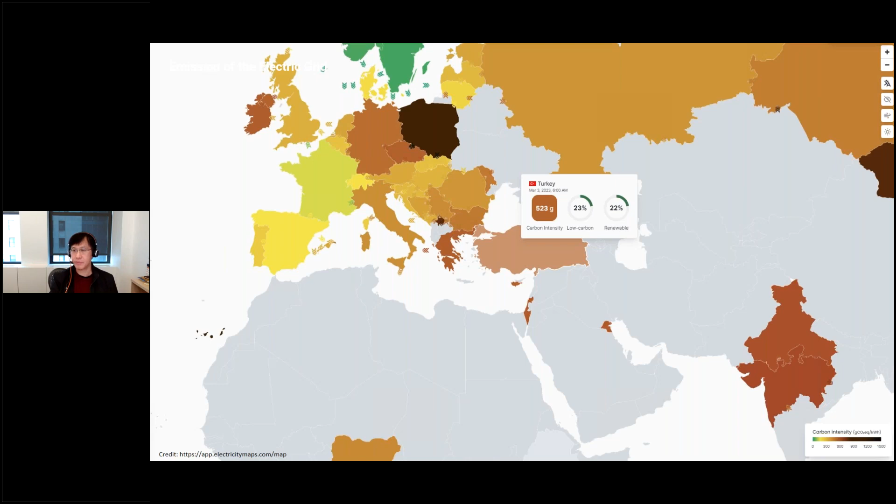And when you look at embodied carbon, the x-axis is different types of buildings, and the y-axis is embodied carbon. Now the range here is about 250 to about 1,000 plus, right? So there's a wide range of embodied carbon. But if you zoom into specific building types, like office buildings, we know roughly it's about 500 kilograms CO2 equivalent per square meter embodied carbon intensity, but it varies. If you go to hospital and health, it could be anywhere from 600 to 1,000. So there's still a range of targets, and we don't have an exact handle on benchmarking, though we now know the range better. So it's not only a moving target in operational, but also embodied carbon.

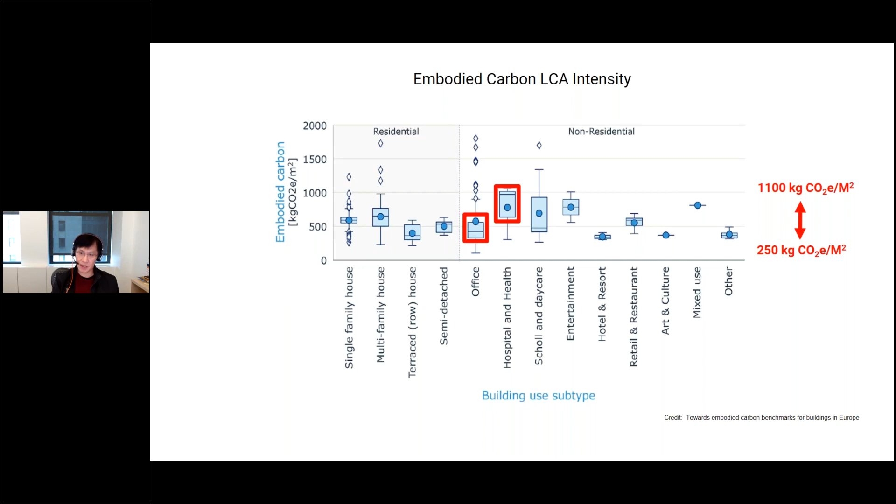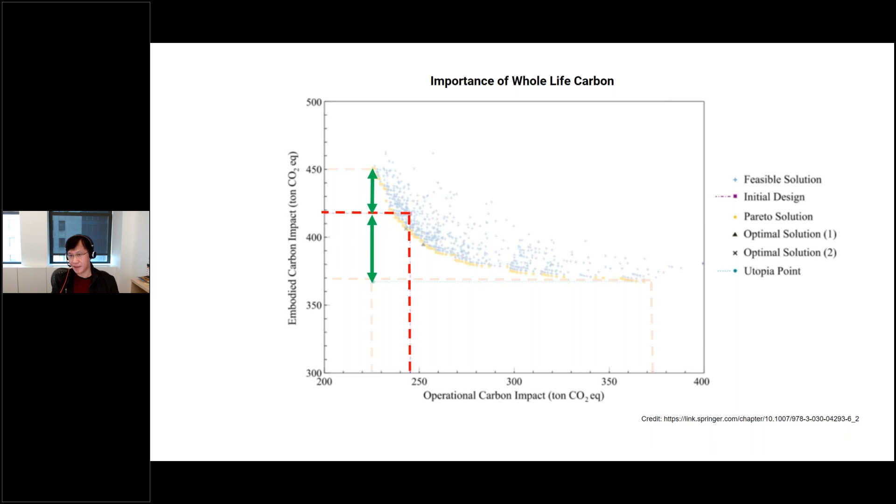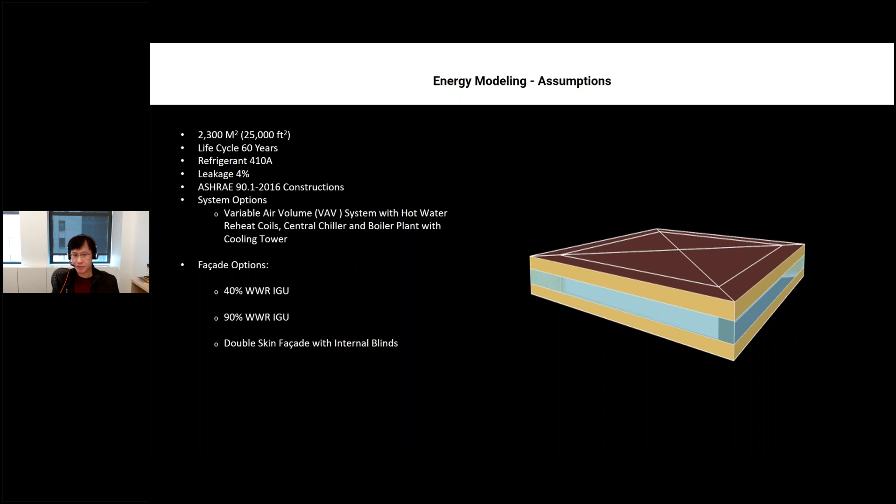Now that is difficult to understand, so I give you an example here. We have an office building about 2,300 square meter floor plate. This is EnergyPlus, very conventional building. We have three options here: 40% window wall ratio, 90% window wall ratio, or a ventilated double skin facade. Now, ventilated double skin facade is basically a triple pane window with ventilation going through it, right?

So if you look at these three options, which one has the most embodied carbon? Of course, the one on the right, because it has 3 panes of window compared to anything on the left. It's only 2 panes of window, a double pane window. So no surprise there. Dotted line is the insulation that is not rock wool. Solid is rock wool, more sustainable. No matter what insulation you use, if you move towards the right, the one with triple pane, absolutely more embodied carbon. But you know what's interesting?

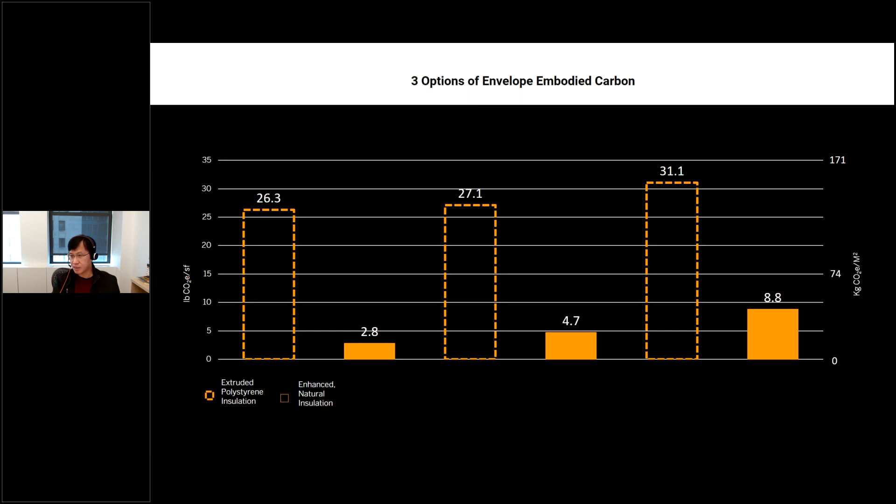Well, this is what's interesting. No doubt the 40% window wall ratio is going to perform better, but what is more interesting is the double pane, typical insulating glass compared to the triple pane with ventilation through window. It has more embodied carbon on the exterior wall, but because of that, it shrinks the MEP embodied carbon and also the refrigerant it requires for that system. And as a result, the bar on the right and the bar in the middle, the embodied carbon of the building is roughly about the same.

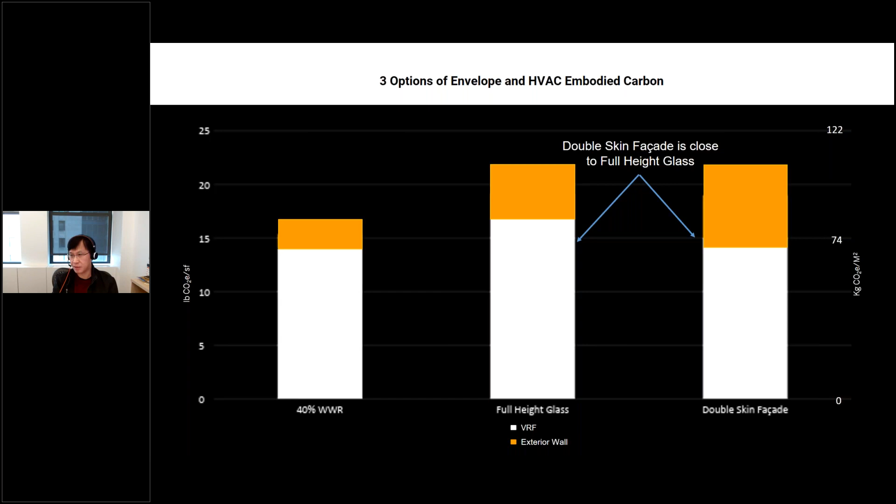Now, if the embodied carbon is about the same, obviously the one on the right with the ventilated double skin facade, energy-wise, is going to perform better. So the learning lesson here is if you have a more passive building with a stronger envelope, oftentimes it pays off because it reduces the MEP system and it also reduces the operational energy. But the second point of this discussion is you really don't know the optimal point of a building until you study the whole life carbon of a building, both operational and embodied carbon integrated together, right? Not separate.

Now, finally, we look at 4 elements that impact whole life carbon. Number 1 is high performance building. So now let's look at an example. This example is a 10,000 square meter all electric building. Upfront carbon is 400 kilograms CO2 equivalent per square meter. The first building we're going to look at has an operational EUI of 125 kilowatt hour per square meter per year. And the grid emission is not 500, the world average is 370 grams CO2 equivalent per kilowatt hour. Okay, so it's slightly cleaner than the grid in Turkey.

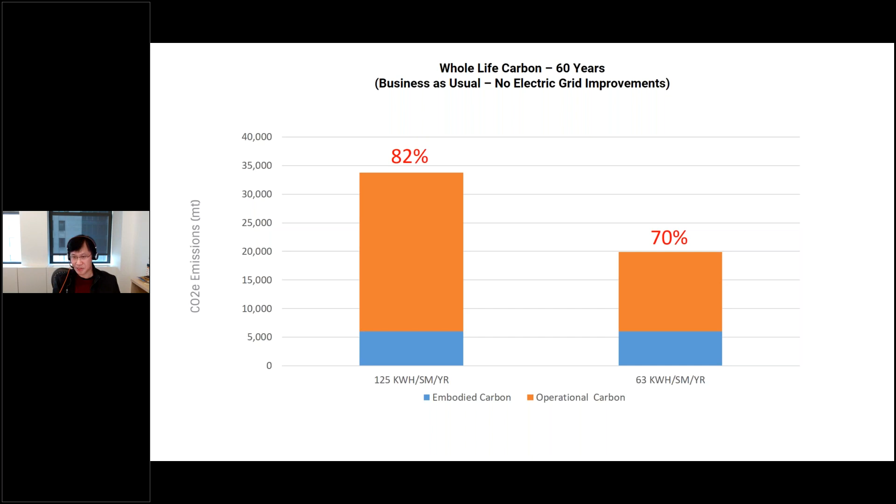Let's look at another scenario now. What if your building, like many of the European new buildings and many of the American buildings too, is going to go net zero operational? Now in Europe, the net zero operational date is actually 2030, right?

If your building is going to be net zero, let's say in this case, I have a net zero building by 2040. Don't forget, in Europe, by 2030, all new buildings should be net zero operational. So this is about 10 years behind that already. So we draw a line there. By 2040, 18 years from now, I will be net zero operational energy.

Well, guess what happened? If today you are at 370 grams CO2 equivalent per kilowatt hour, you're going to draw a linear line of reduction from 0.37 to 0.02 kilograms CO2 per kilowatt hour, right? As a result, it is not business as usual emission, that linear line that just keeps going up. You just start to bend the carbon curve. So this is what happened with your 125 kilowatt hour per square meter per year building and 63.

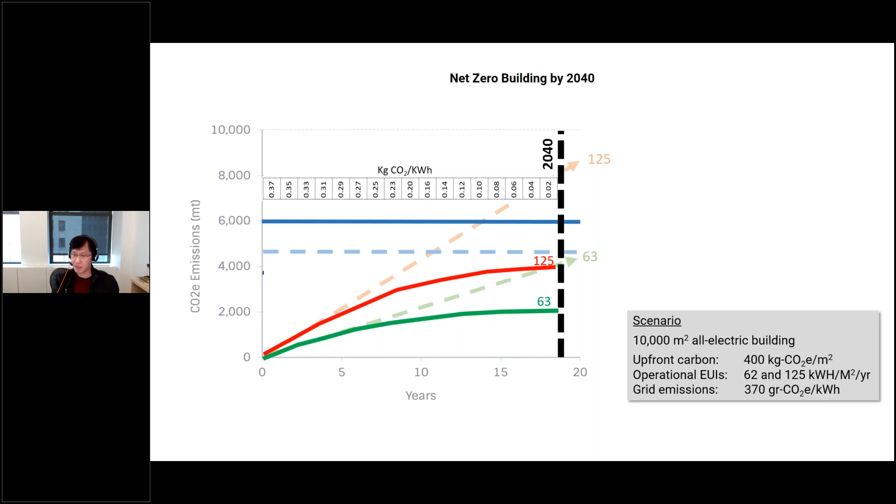When you bend the carbon curve, this is what happens when you have a net zero operational energy building by 2040, or if your electric grid is all cleaned up by 2040. The operational carbon for the 125 kilowatt hour per square meter per year building is only 47% operational carbon emission in its whole life cycle. And if you have a 63 kilowatt hour per square meter per year building, only 30% is operational carbon in its entire life cycle. Embodied carbon dominates the discussion.

That is why we need to start focusing on optimization of whole life carbon, because in many buildings we are planning in Europe, by 2030, you will be seeing all new buildings are net zero operation. So if you look at business as usual, the red on the left, or 2040 net zero operation, the green on the right, you see the operational carbon, the orange color bar, start reducing rapidly.

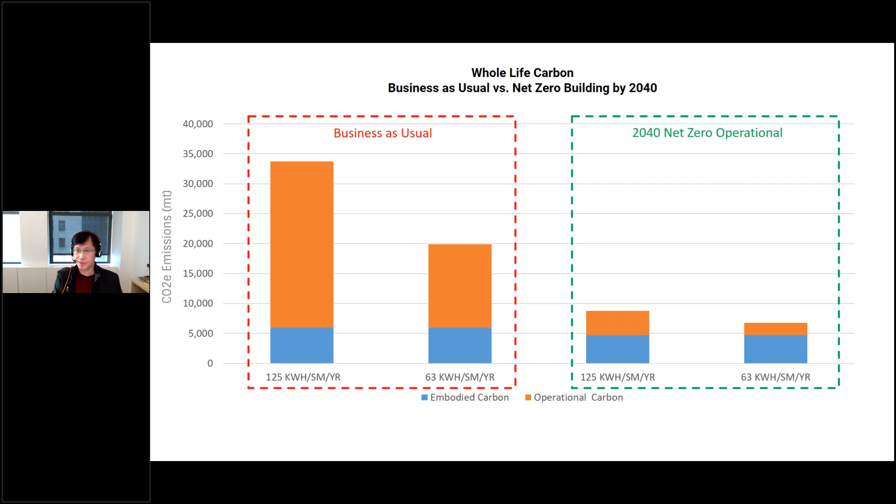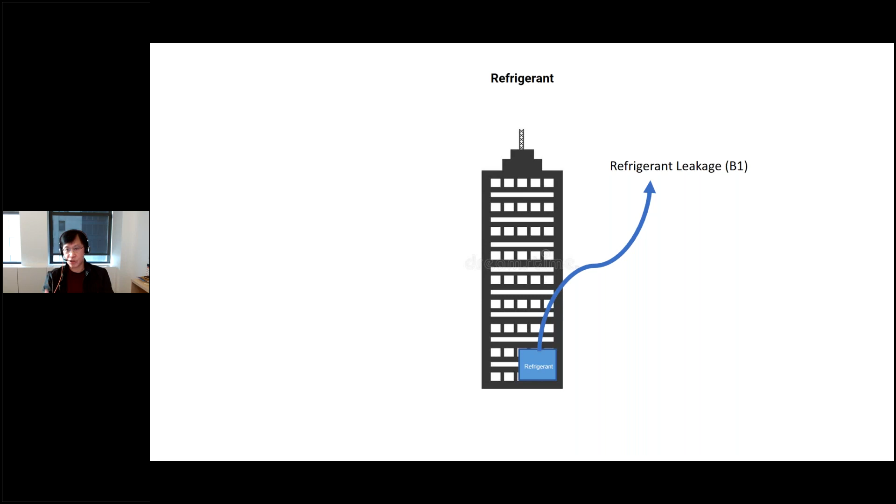Okay, how about refrigerant? Well, refrigerant is what we call B1, it is embodied carbon. Why is it embodied carbon? Because it comes with the building, and during the operation of the building, it leaks. But that leakage is a replenishment of the embodied carbon, which is not the energy it needs to run the building, or the EUI of the building. So the EUI of a building is not the same as refrigerant leakage, which is embodied carbon. In fact, in EN 15978, B1 is leakage of carbon, B6 is operational energy. So they are not the same bucket. One is embodied carbon, the other is operational.

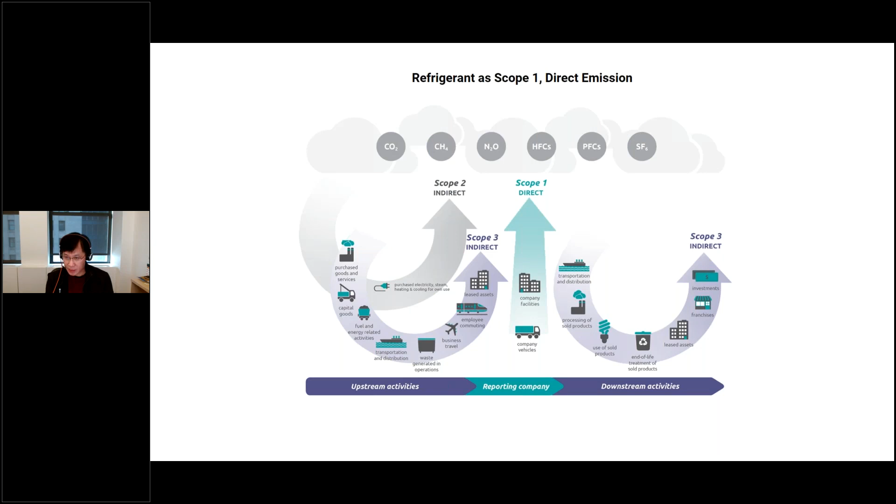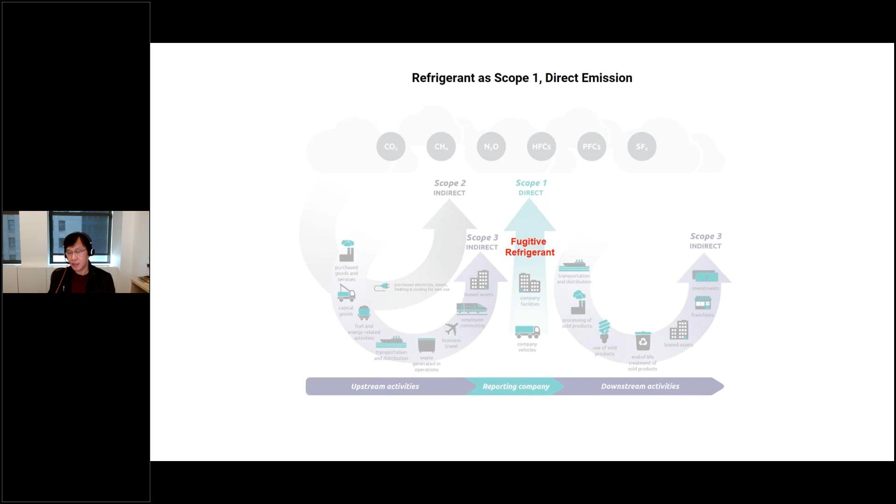But if you look at scope 1, 2, 3 emissions of an organization, not a building, then under scope 1 emission, refrigerant is under fugitive refrigerant, that's refrigerant leakage, which is scope 1 direct emission of an organization. Scope 1, 2, 3 is not the same as whole life carbon. We should be mindful of that. So this is the upfront carbon: it is 10% more added to the upfront carbon if you add refrigerant, and the whole life embodied carbon is 20% more.

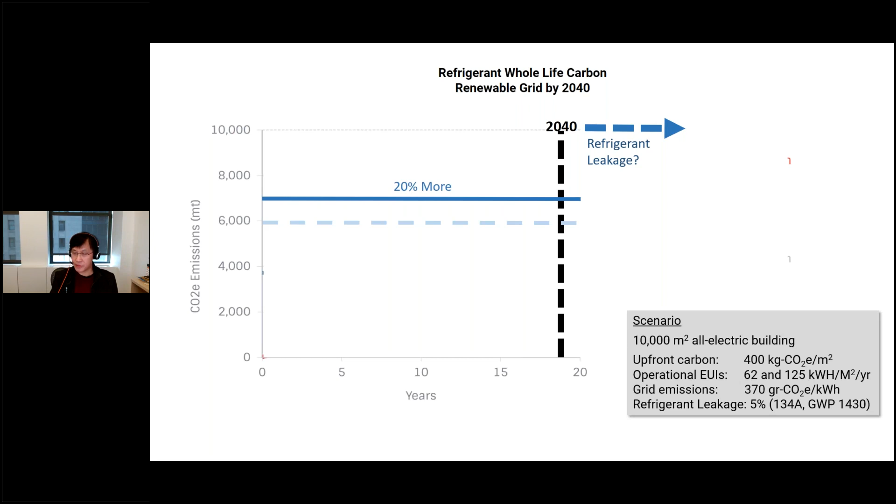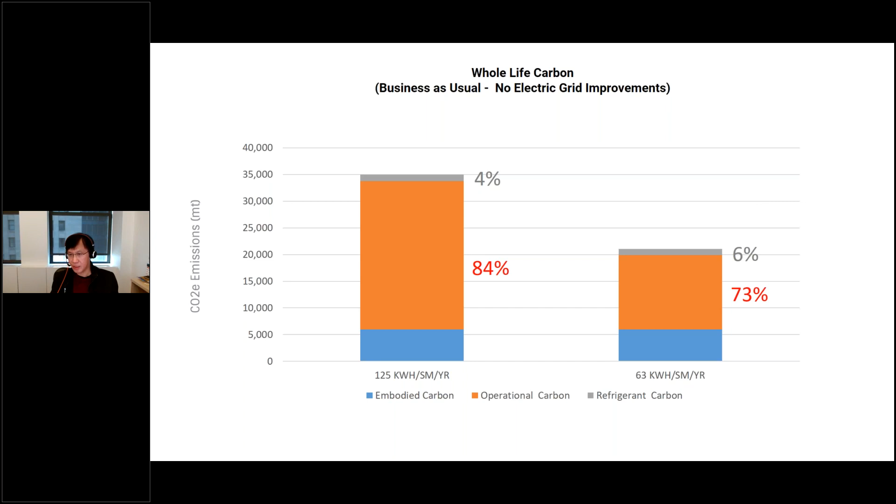So again, if you draw a line at 2040, well, what happens after that? What happens to the GWP, global warming potential, of refrigerant? What we are seeing is a rapid decrease in the GWP in many of the chillers coming out. So what will happen to refrigerant leakage in the future, right? So if we include refrigerant leakage in the business as usual, the linear projection with no net zero building, it is not very significant, 4 to 6%. But if we look at a net zero building, refrigerants start becoming more important, 12 to 15%.

Potentially, it is the carbon inside the atmosphere. If I emit carbon into the atmosphere today, it stays in the atmosphere that much longer than carbon I emit 10 years from now. So that's why there's a time value of carbon. By the way, this is not well understood and not well established, so this is a little bit of a guessing game. Let's use a 3% time value of carbon.

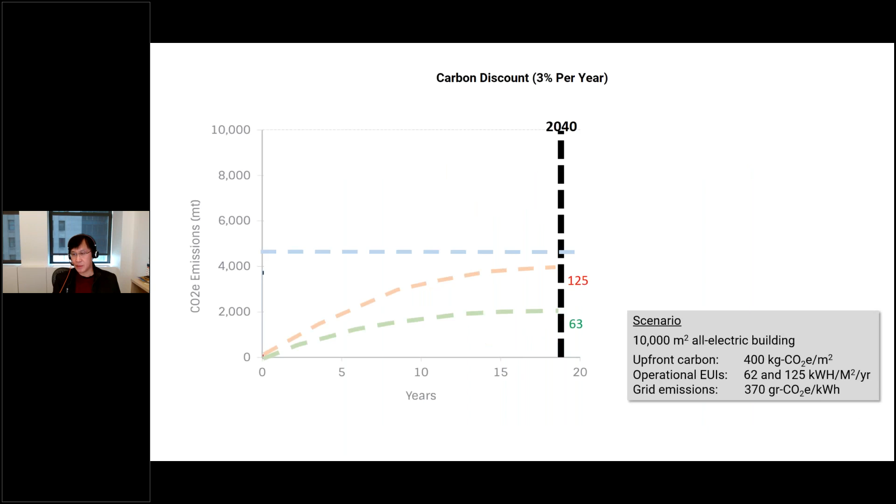So with that, to draw to a conclusion, I want to summarize the 3 things we talked about today. Number 1, why whole life carbon, whether operational or embodied carbon, is a moving target; it's not easy to establish all the numbers yet. Number 2, when you optimize carbon, you cannot just optimize operational or embodied alone. You have to look at them together, not in silos, to get the true optimum. And number 3, the 4 elements in whole life carbon and how they impact whole life carbon.

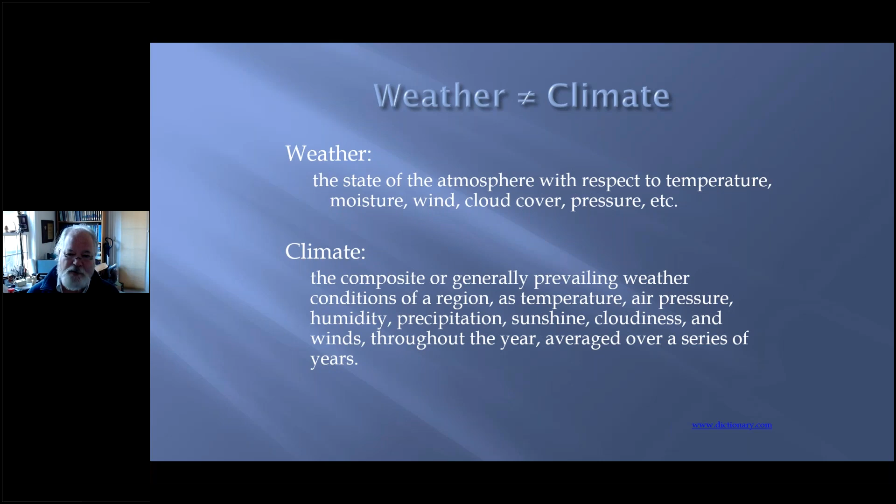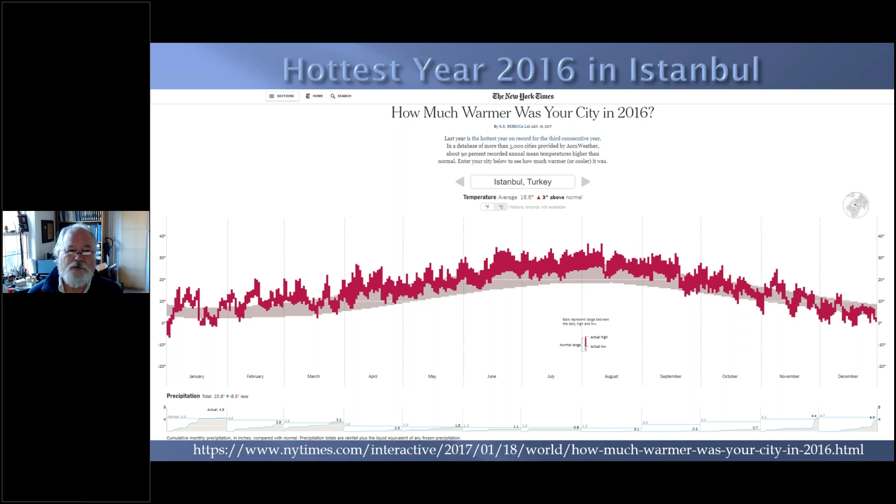When I show this chart for other cities, what we'll see is that in the spring and fall times of the year we'll actually see all-time high temperatures being set. So it does vary quite a bit in what you see. I did a presentation for Brazil yesterday, and they're having the same issue, except that March and April of 2016 were actually quite cool for them. So they were below normal for that year, so it's not evenly distributed.

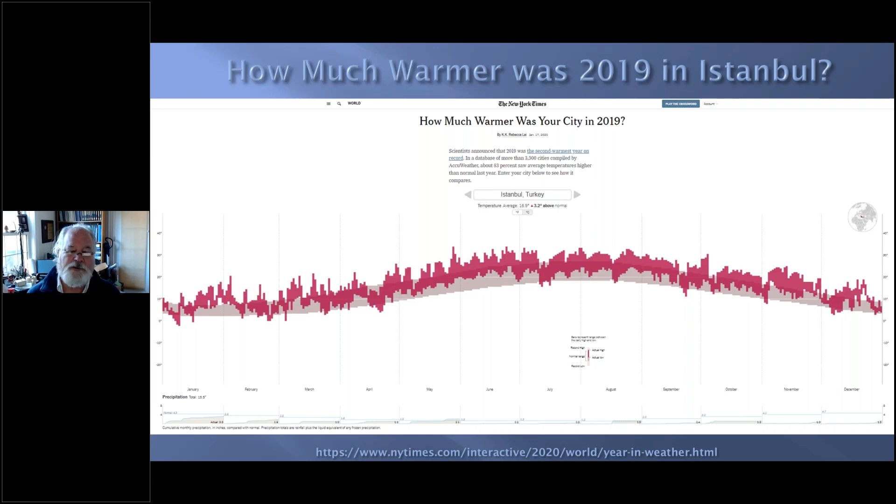Similarly, 2019, a second hottest year. Again, we see much of the year is above the normal range throughout the year, not just the summer months. And when you see this, you'll see that much of the change is not so much in the summertime, but in the spring and fall months, and sometimes in the winter as well.

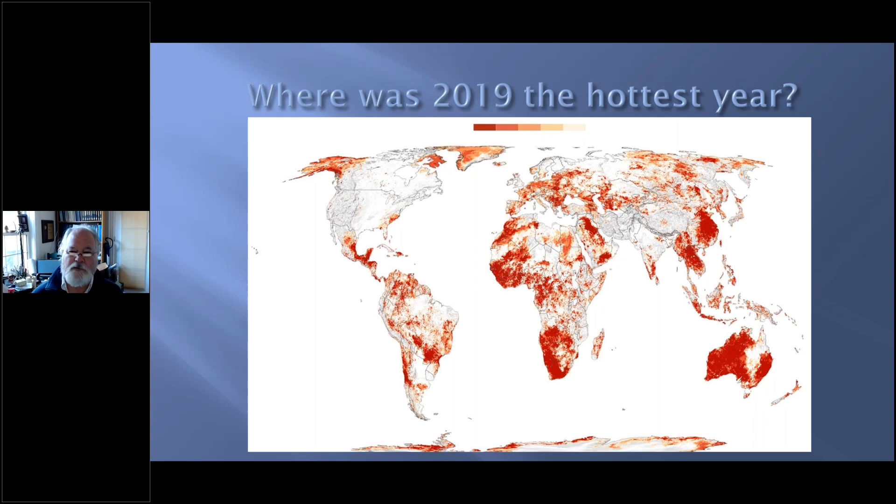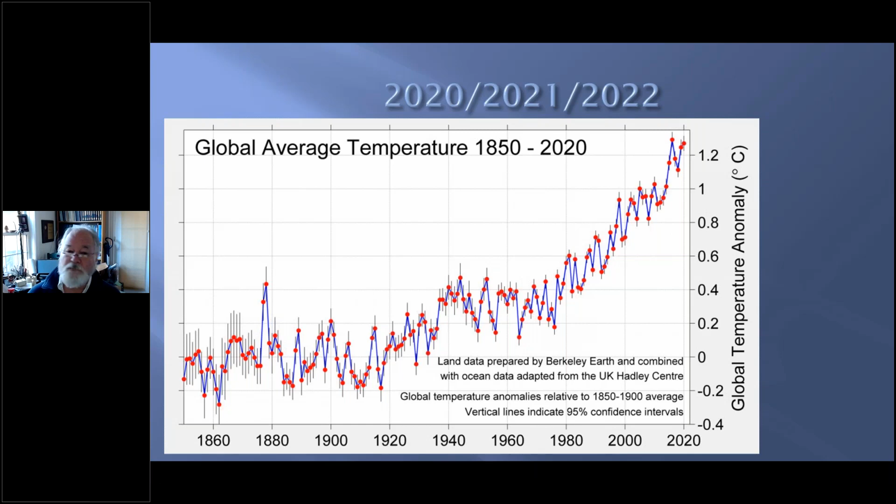Global average temperature, this is a global average, and when they talk about temperature change, this is what they're looking at. By 2021, we're already looking at 1.2 degrees from that historic period, and that's a big change that you are already seeing. We're not talking about 2100, we're talking about today.

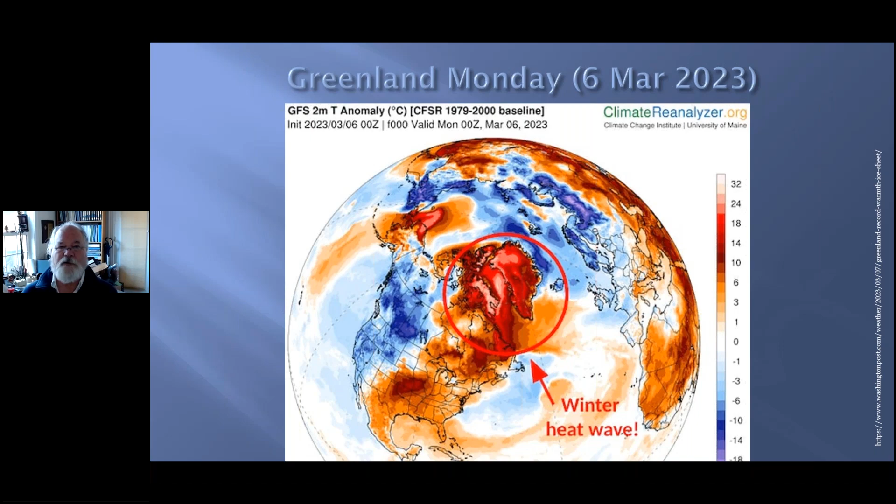2020, particularly hot in Siberia and parts of Asia. Europe was quite hot in 2021. North America had a hot spot as well, and then this past June as well. But one of the interesting things, this came up in my paper this morning, Greenland on Monday was 25 degrees Celsius above normal. And the jet stream was driving a lot of the hotter weather that's been on the eastern and central US up over the ice in Greenland, causing a huge meltdown going on there right now. And that variation, that change, is what we've been seeing recently.

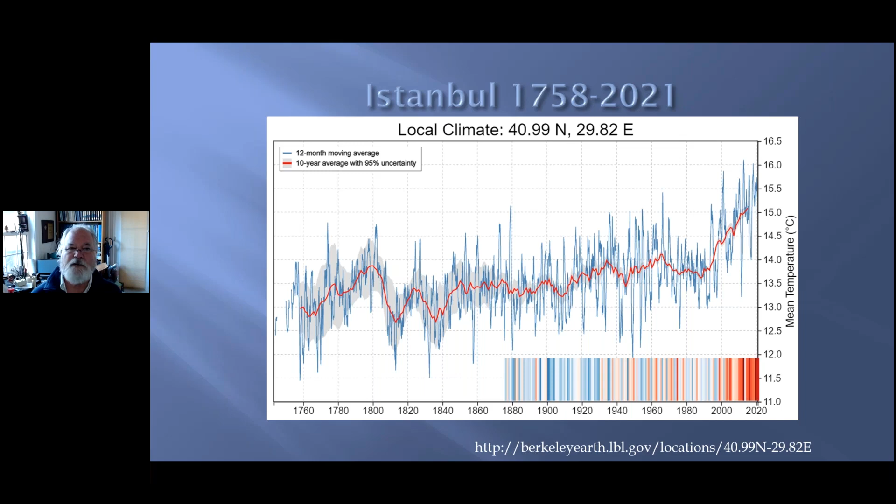If we look at Istanbul specifically, there's a great website, Berkeley Earth, that has data. You can go in and enter any location and look at the long-term trends. And what we're seeing here, for example, is over the last 25 years, temperatures in Istanbul are up about 1.5 degrees for that time frame. That's averaged over the year.

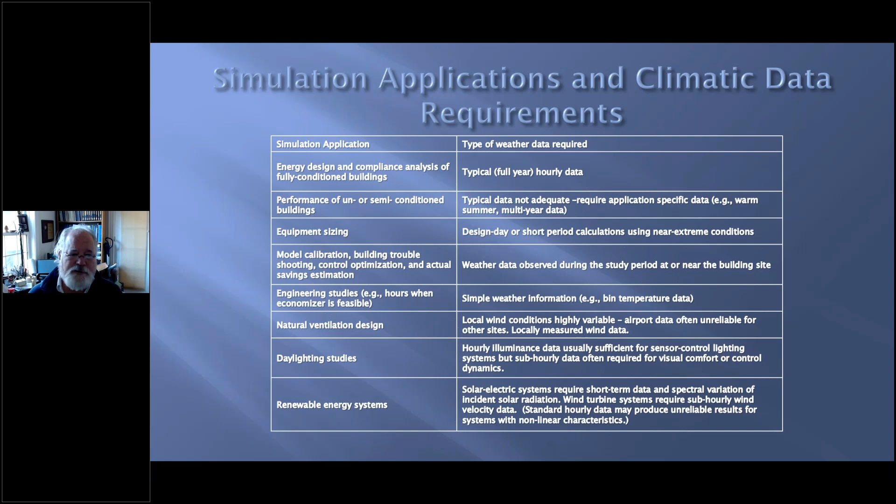If we're doing a full simulation, I'm not going to detail all this, but if we're doing a full simulation, we need typical full year data, and hourly is about the best we can normally do. If we're doing equipment sizing, we need design day information, such as that we can get from the ASHRAE handbook, and other variations there. So it's not all the same types that we need.

But one of the issues we have is that there's not good data for a lot of the weather data universally throughout the globe. Dry bulb is pretty commonly observed. We have good data there, primarily from weather stations at airports. Humidity, similar. Solar radiation, there's almost no data measured globally on a regular basis. Solar illuminance, the same. Wind is also a bit problematic just because the local effects of, is it open terrain, is it hilly, is it urban, etc., will change a lot of that as well. So some of the data are just not there.

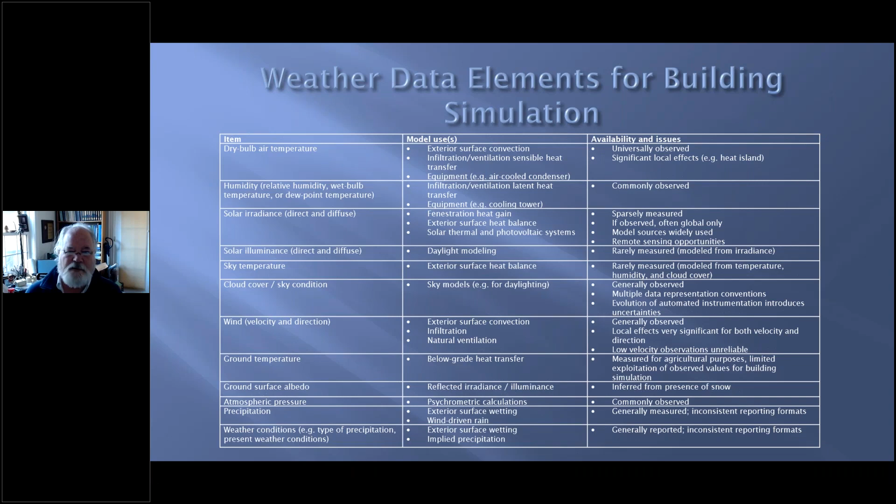But one of the nice things about climatic data is that in the past it's only been available from these ground observation stations, these airport stations. Temperature, humidity, robust, wind, problematic, and it rarely, almost never includes solar data. And then we may have some limitations on other data as well. But now with 20 to 40 years of satellite data, we're now beginning to see very good quality of that data.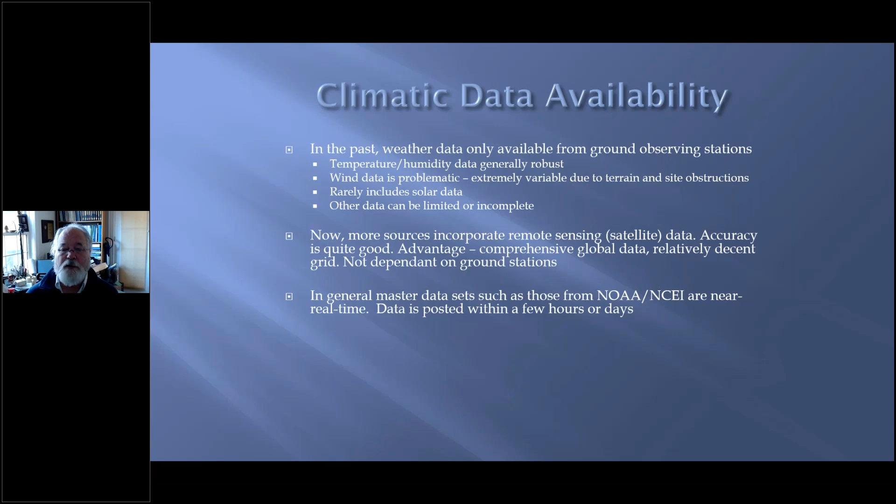NASA has been working with the ASHRAE Technical Committee on Climate Information to see whether it's possible from the remote sensing, the satellite data, to actually replicate the ASHRAE design conditions. They're actually quite good for that. The master data sets, there's one from the National Centers for Environmental Information. It's updated near real time. This is a repository of weather data globally that's stored for the World Meteorological Organization. But we can't use the raw data. We need some analysis and data filling before it can be used.

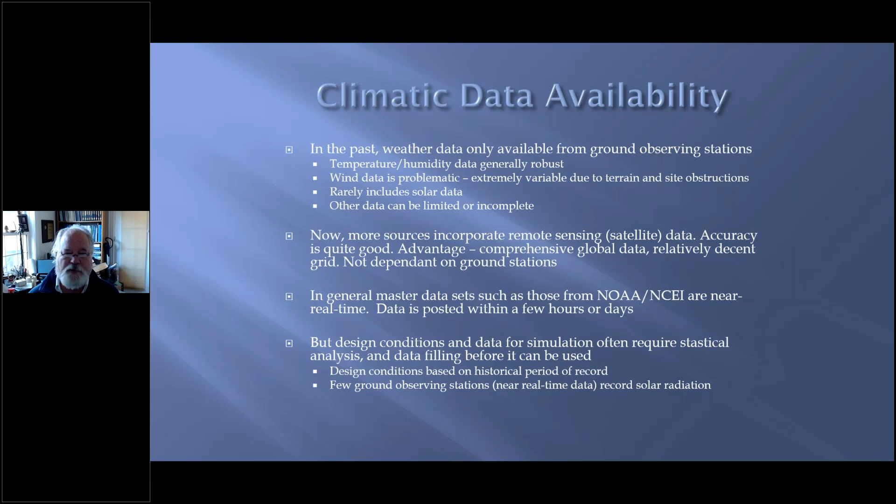The design conditions are generally based on a historical period of record, and that means we lag. So the handbook, even though it may be 2021, won't include data all the way up into 2021. Also limited solar radiation we mentioned before. So design conditions, as design engineers, you're probably very familiar with using those to size and select equipment for heating, ventilating, air conditioning, but they're also used in residential, agricultural, commercial, and industrial applications as well, not just the HVAC industry. Usually it's dry bulb, wet bulb, dew point, and wind speed at various frequencies.

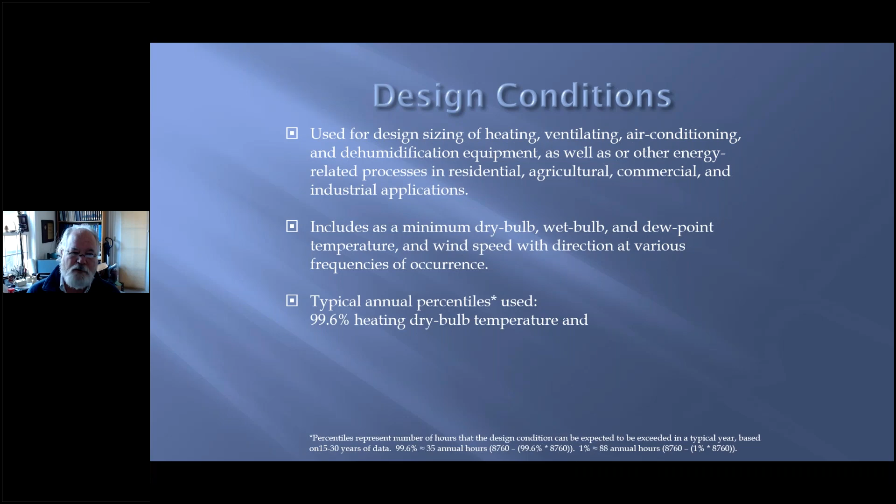And the concept used within the ASHRAE handbook is the idea of a percentile. That means that for a certain percentile of hours in a year, you would expect temperatures to be higher or lower. So 99.6 means about 35 hours a year it'll be colder than that, not too many hours. It won't be all the same day or one period. And the other typical is a 1% on the cooling dry bulb. This is for traditional design, nothing requiring closer control. 1% on the other hand means about 88 hours a year.

But there are other percentiles. There's a 99, a little less strict on the heating, also 0.4, 2, and 5 on the cooling as well. And since 2012, the Load Calculation Committee has recommended using monthly cooling percentiles. The primary reason is with the sun angles so high in the July, August timeframe, we're not actually getting much direct sunlight on the glazing. And we often will get peak cooling load conditions in September or October, I've even seen. So it's better to use the monthly cooling percentiles. The 5% monthly is equivalent to about the 1% annual.

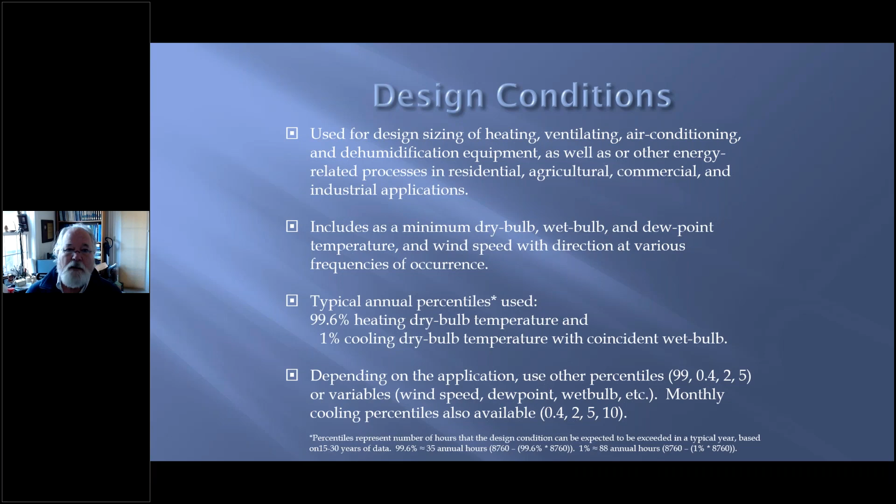So the 2021 handbook is the best source and has about 9,200 locations globally. It is based on that data from NCEI through 2019. So it doesn't include the last 2 years, but there's some processing time that it takes to generate a data set of this scale. But we have looked at the climate conditions that have been changing.

There was a study for the 2009 handbook that found the 99.6 heating dry bulb temperature was increasing about 1.5 degrees globally, and the 0.4 about 0.8 degrees. It varies all over the place. A more recent study, for the 2017 handbook, showed that it varied from minus 0.2 to plus 0.2, but there was a slight signal overall that showed a change of about 0.05 degrees a year.

So about 1 degree every 20 years is what has been seen already. So the handbook has quite good data for the Northern Hemisphere and a bit less good in the Southern Hemisphere, particularly if you look at Africa. Until the 2021 handbook, there was no design condition for the largest economy in Africa, which is Nigeria, and still the fastest growing economy. There is one now, but that's still a problem.

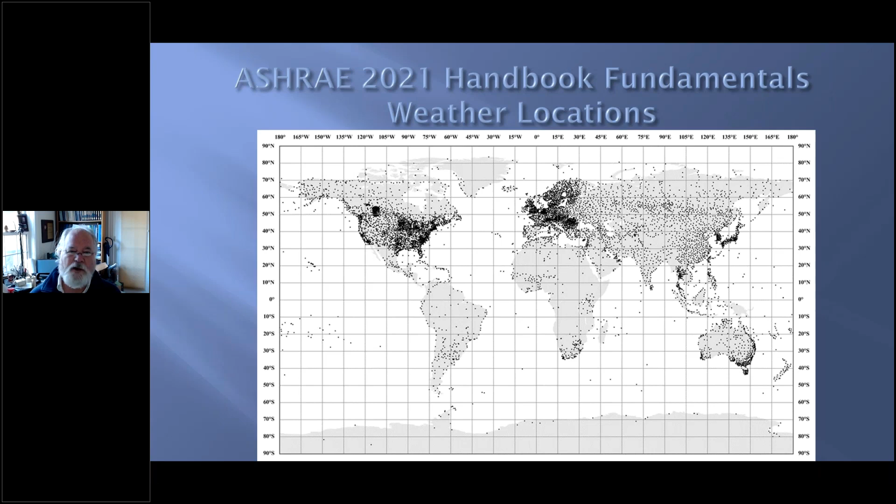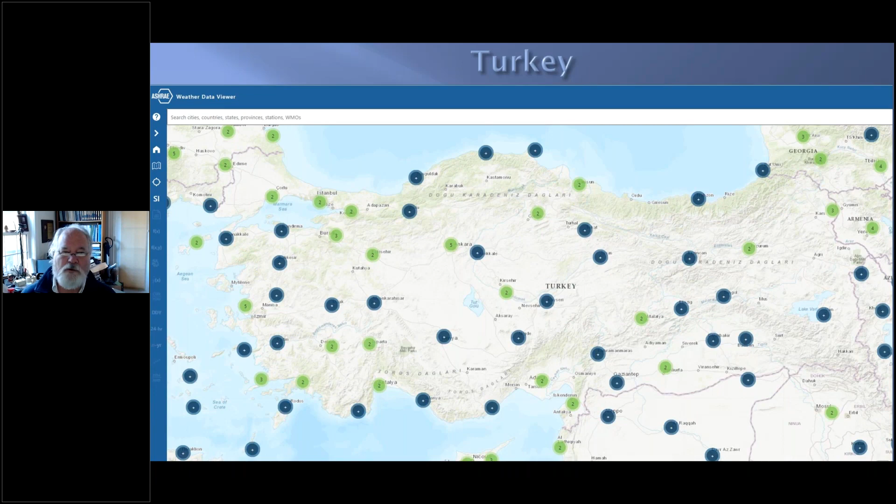Africa is a bit sparse on there, but we have some new sources that can help with that. This is the ASHRAE web-based station finder. It allows you to look up data for that. You can click, say, I want a specific country, and click on Turkey, and then it'll show you all the locations related for Turkey. The numbers in there indicate how many stations there are within that locality.

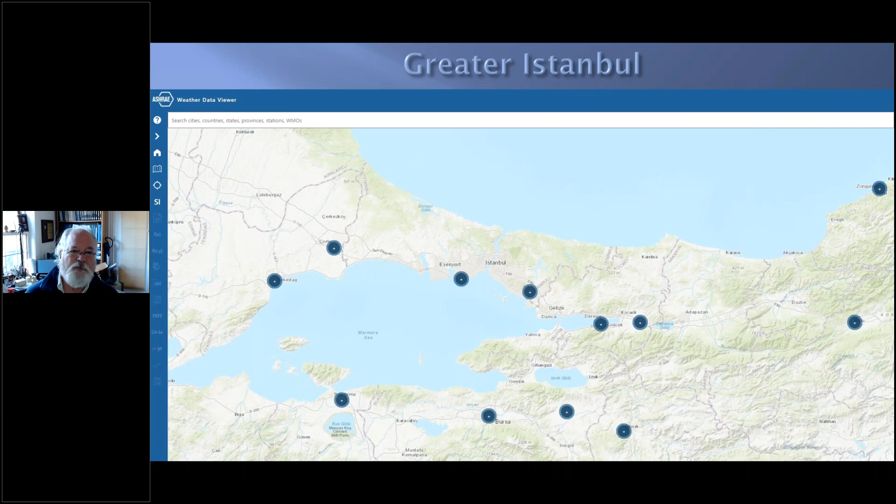So Greater Istanbul, we have a number of stations right around the Marmara Sea, but the data, of course, is old enough that we don't have the new Istanbul airport, but the Ataturk data is still there, and we can take a look at that. The standard output is this one pager, but that tool allows you to do all sorts of manipulation of the data and looking at joint frequencies and other things that I'm not going to cover here. But a one page kind of summarizing annual conditions, monthly conditions, etc., all in one page.

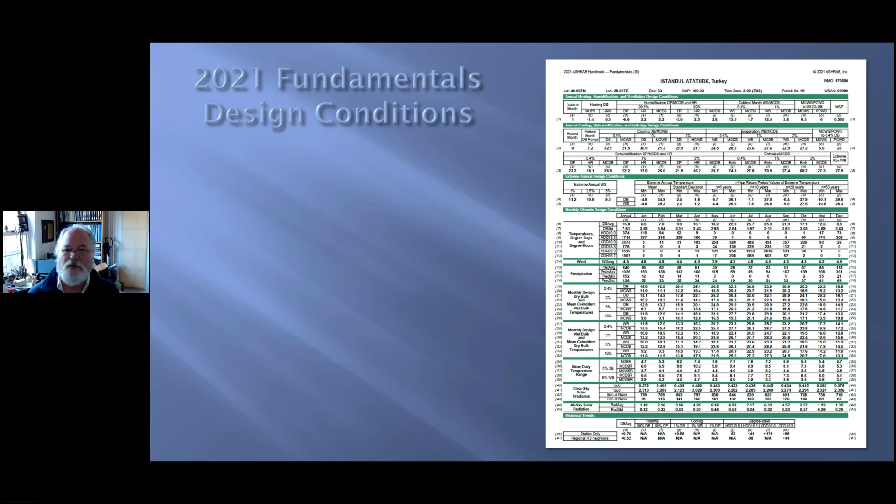So let's look at it in a little more detail. The top part is the annual heating. So there we'll see the heating dry bulb 99.6 for Istanbul is about minus 1.4. There, the annual cooling, the 1% dry bulb 30.9, and the hottest month is August. And you have other evaporation, dehumidification, enthalpy variations on the cooling side. Then the next section in these extreme annual conditions, they have a set of statistical based information saying that statistically based on the information of the past, the return period, as they call it, is for 50 years, it could be up to 39 in Istanbul.

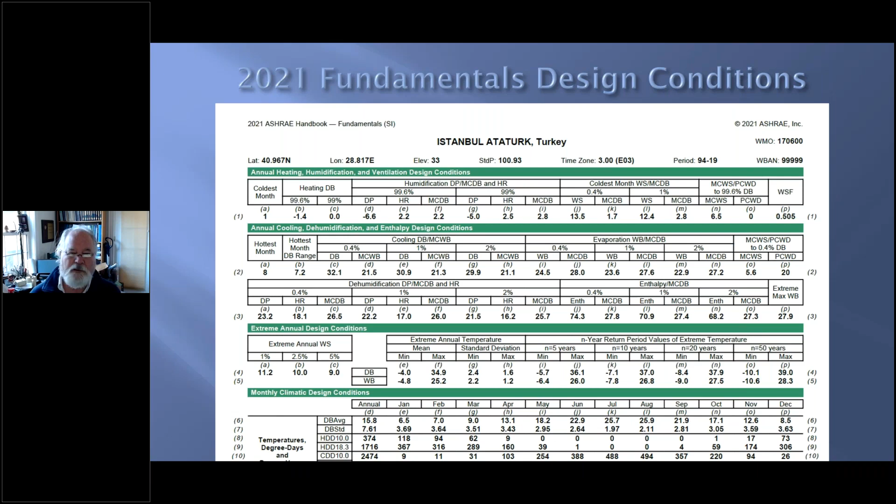So the next section is monthly design conditions. So we have temperatures, degree days, degree hours, wind, precipitation, the monthly percentiles for dry bulb, the monthly percentiles for wet bulb, and a mean daily temperature range. So you have them annually and also by month for these data. At the bottom, the last three sections, the daily temperature range varying by month, and also the clear sky solar irradiance for that. And that's for the ASHRAE design calculation conditions. Clear sky and all sky solar radiation variation with the variables you need for doing that.

The last section, the historical trends, is what's new. And it looks at the long-term data set for that location, but also its neighbors. And in this case, the average dry bulb over the last 30 years has seen about a 0.75 increase. The cooling 1% about 0.6, and we're seeing some drops in the heating degree days and increases in cooling degree days. Not all locations have this sort of signal. This is one of the stronger ones I've seen.

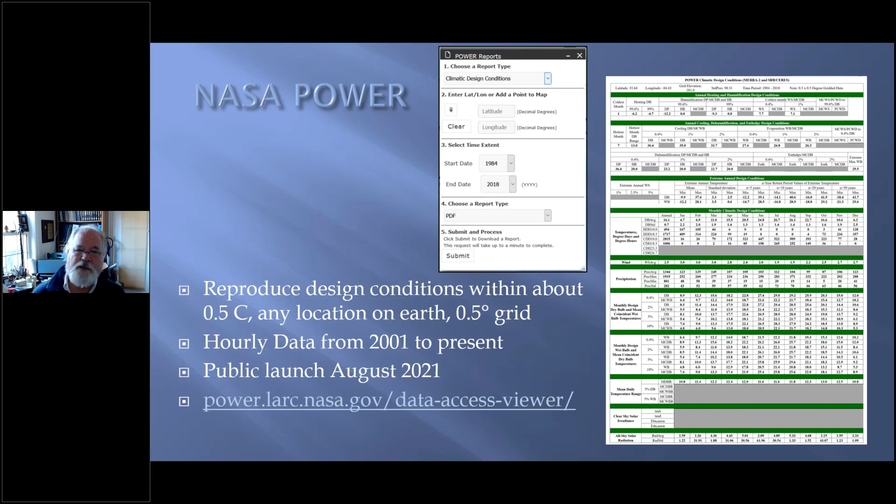I mentioned the NASA project. This is NASA Power, and they can replicate the data that you can get here so that, for any point on the planet on a 0.5-degree grid, you can match the design conditions within about a half a degree Celsius, and that is a useful thing to do. It has data for only 2001 to present, but that's where a lot of the data are now. So it's been out for about 1.5 years. It continues to get more robust. They're going to take the grid to a smaller grid over the next year or two.

Building simulation, I mentioned earlier. We need to have climatic data so that we can simulate performance from a single year analysis. There's a methodology, typical meteorological year. It's most widely used. Essentially, it is a composite of months. It might have January from 2015. It might have February from 2011, and the whole year put together as a composite. But each of them is representative for the period of record.

There's an ISO standard which also uses that. The months are selected based on statistical indices, daily min, mean, and max of multiple variables. But the weights of those can change depending on the methodology. The ISO standard doesn't recommend a particular set of weightings, but the TMY has kind of an equal weighting basis, but I've seen others that overweight solar radiation if you're more interested in that.

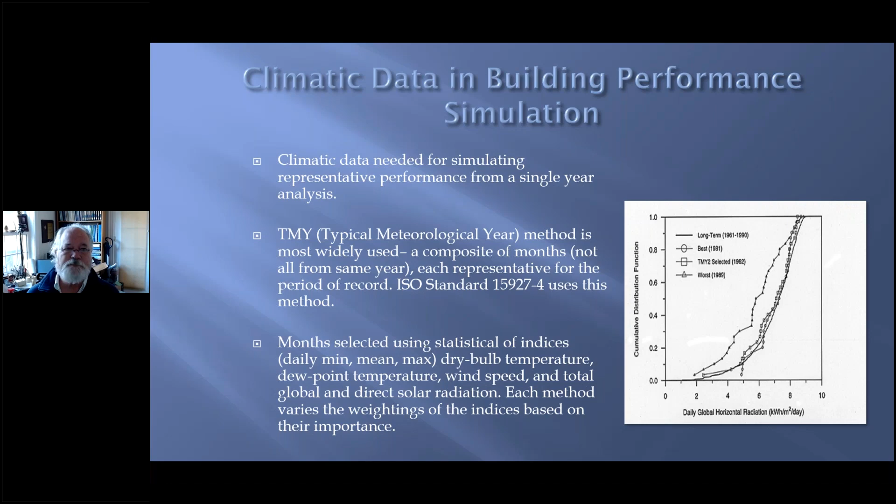Some of the data sets available, the TMY data sets, though, are best for comparing alternatives. They're not intended to tell you what the energy use of your building is going to be. It is a kind of a comparative number. Compliance with building standards and codes which use performance methods, and getting points for green building rating systems. But there's no effort in there. In fact, the effort is to get typical, not extreme conditions, and they don't necessarily cover or represent the design conditions.

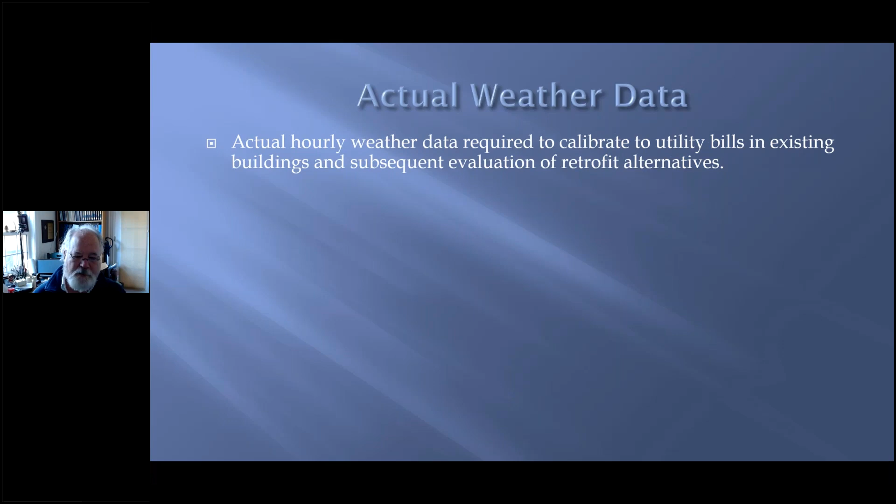Actual weather data: if we're trying to retrofit an existing building and we need to calibrate its energy use to utility bills, we'll see that we need maybe a couple years, maybe 3 years of actual weather data. There are many sources. I mentioned the National Centers for Environmental Information, NCEI. That data is free, but Weather Bank, Weather Source, Weather Underground are all private organizations who sell and package weather data. And also the National Meteorological Office will often make data available.

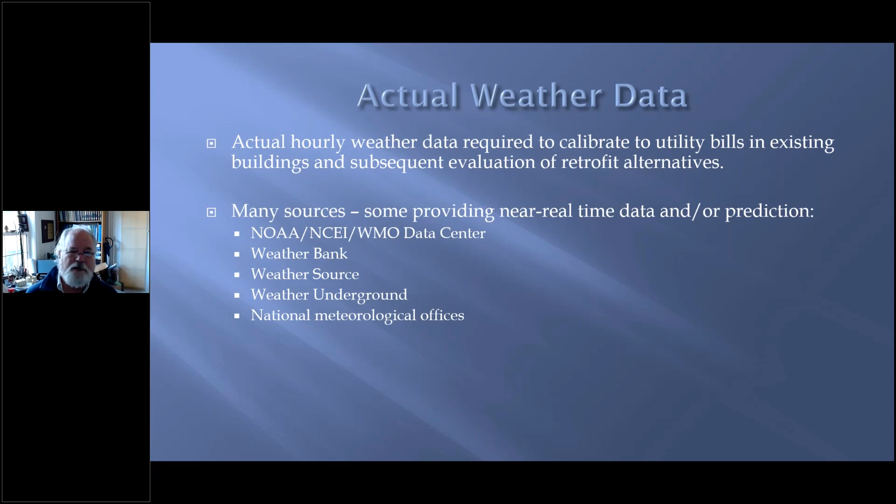The same data that the National Meteorological Offices use is provided back to NCEI, but they don't necessarily have all the stations that the country offices are collecting. But how complete are they, and does it include what we need for energy simulation: temperature, humidity, wind, solar radiation?

This is an example of using typical weather. This is the location, actually just 10 kilometers from my house, Washington, D.C.'s National Airport. And it's the most complete data set I've seen. I've seen hourly data sets in Europe that date back into the early 1930s, but this one starts in 1937, and it's complete from 1938 to present. What I've done is simulated a small office building showing the change. This only has data through 2016 for this chart.

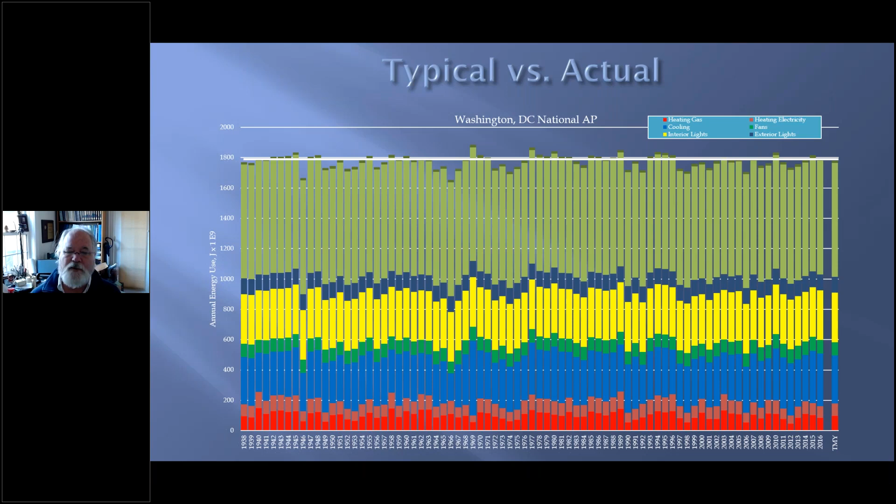But the, oops, sorry, went the wrong way. The typical TMY for this location is there on the right side. And if we drew a line, as I just did, you'll see that it does what it's supposed to do. It's not the most extreme, most energy, and it's not the least energy. It's kind of in the middle, not a mean specifically, but close to the middle.

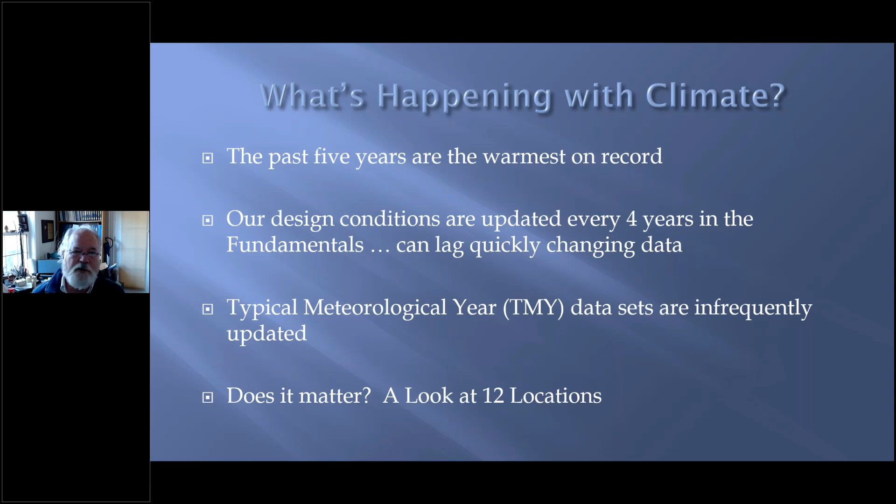So what's happening? Past 5 years have been the warmest on record, and our design conditions are only updated by ASHRAE in the Fundamentals every 4 years. So the 2017 came out, and already 2016 had been the global hottest year, but we didn't reflect that. As I mentioned, like the TMY3, the TMYs are not updated very frequently, so they can lag as well. So does it matter? We did a quick look at a few locations. There's the older US data sets, but also some of the international weather data sets, and this newer TMYX data set that I talked about had data through 2021.

Looking at the TMY type data, this is how the heating degree days have changed. You can see there's Buenos Aires, Cairo, Denver, London, Los Angeles, Madrid, New Delhi, Sao Paulo, Singapore, Washington Dulles near me, Winnipeg up in Canada, and the highest one there, Resolute, above the Arctic Circle. And you see in almost all cases, heating degree days have changed. The exception there is Singapore, where it doesn't ever get cold enough to have any heating degree days.

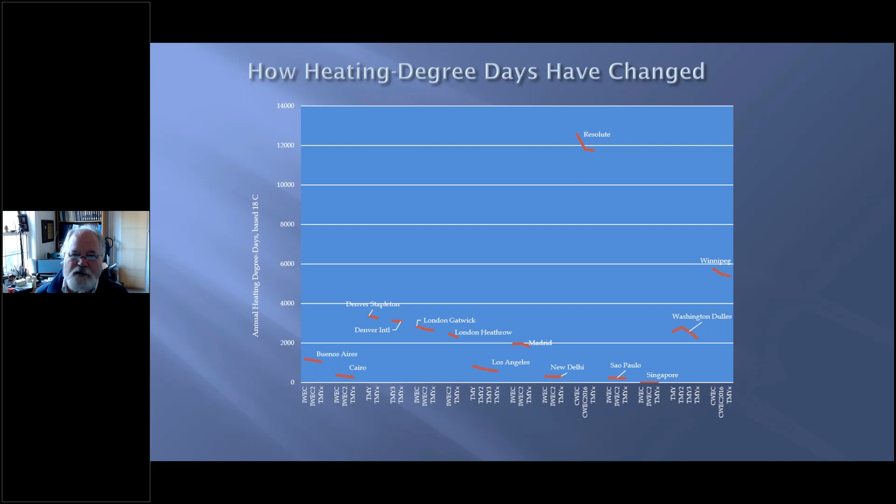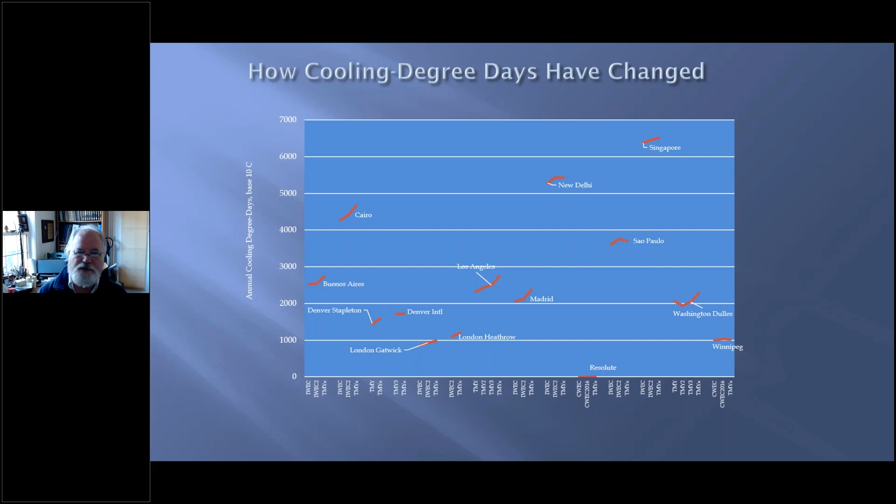Cooling degree days, of course, we'd expect to see the opposite trend, and we do. Cairo, for example, is increasing about 10 to 15% over that period, and Delhi on the order of about 10%. Singapore, same sort of change. So we are seeing the change over that period. Washington Dulles about the same scale, maybe even 15% there. So you can see how different locations are changing. But how does that mean the design conditions are changing? What we have here, the locations listed alphabetically. The lightest bar is the 1997 handbook, and the darkest red bar is the current handbook.

And you often see that last increase is actually quite a bit of a jump, almost half a degree in many locations. That's because we're connecting with that data up through 2019, which includes the 2 warmest years globally, and we're seeing that change. The one exception is there at the bottom, and that's Winnipeg. And I don't know why Winnipeg's getting a little cooler in the summer, but it is there.

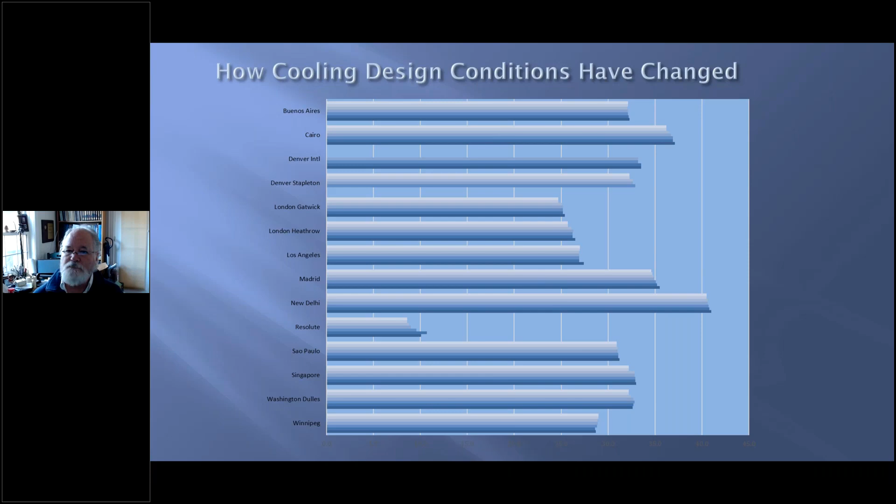This shows simulating the same thing. Now we've seen the design conditions shift a little bit, but it's interesting that you're not seeing the increase in energy use you would expect. And part of that is if you look at the red portion of the stacked bars, what you're seeing is that decreasing. Let's look at Washington Dulles there, second from the right, and you see actual overall energy use is decreasing.

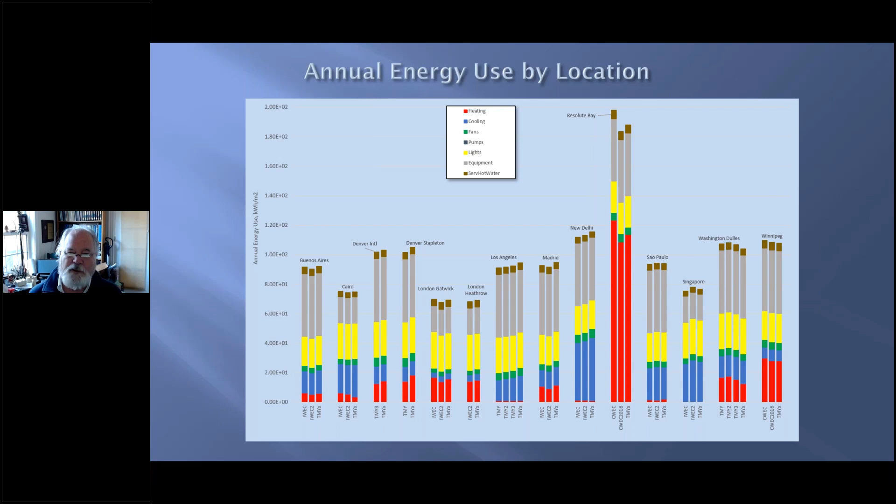What's happening there is that heating is decreasing more than cooling is increasing. This is a site energy use, not a primary energy use. If it were primary source energy, it would likely be a little more of an increase. So heating's decreasing more than cooling's increasing is what's happening. So we're seeing almost no impact here, a little bit more in Los Angeles, New Delhi, Singapore, all of course being hot climates, so looking at what's going on there is important.

The other thing that happens is there's heat island effect. There are 3 of those weather stations on this map. The far left, that's Washington Dulles Airport, which I've been talking about. In the center, just below the word Washington, that's actually the District of Columbia, that portion of the square there. That's Washington National Airport, which had the long-term record. And then there's another joint Air Force base there off to the right.

In 2018, NOAA came in and did a look at the heat island for the particular location, and they measured it all over the city. And what you see there is a variation of about 10 to 12 degrees between hot and cold. We see cooler temperatures prevailing up the river. That's the river that flows through Washington, the Potomac. But then we see much hotter in kind of the central area where all the businesses are, and the White House and the Capitol, etc.

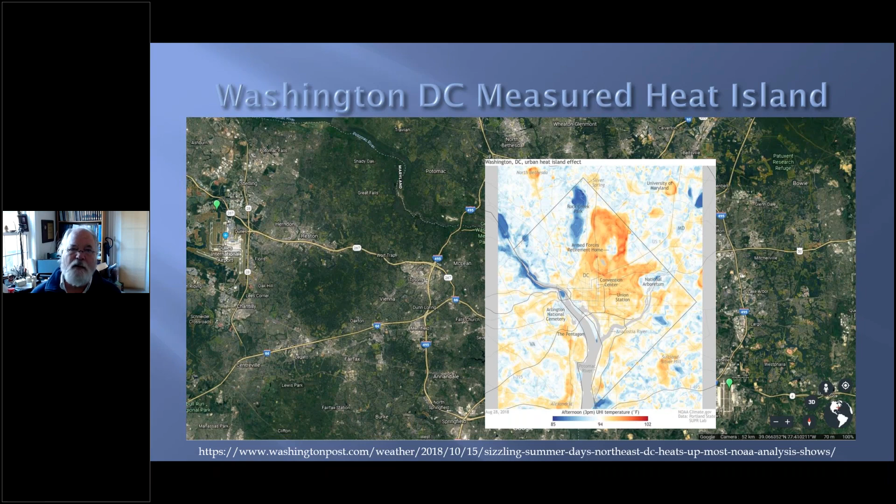So for creating future climate, there are 4 major methods for doing this. The first 2 involve very computer intensive methods. Dynamic downscaling takes these global simulation models and downscales them to a smaller grid to be able to use that more locally. Statistical models try to look at all the data related to distributions of weather variables and how they interact. So it gives you not a single path forward or a single view of where the weather will be, but different scenarios of where it could be. And so any of the outputs from that can be possible, both very computer intensive.

The one used most is time series adjustment or morphing, and I'll talk a little bit about it and show you an example of that. The easiest one is the analog. You just try to find existing locations that already have data that are comparable to what the predicted climate change scenario is showing.

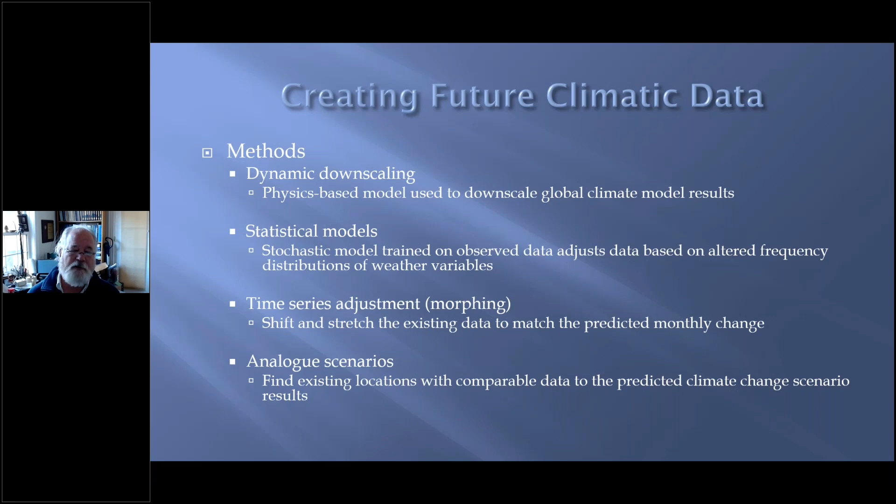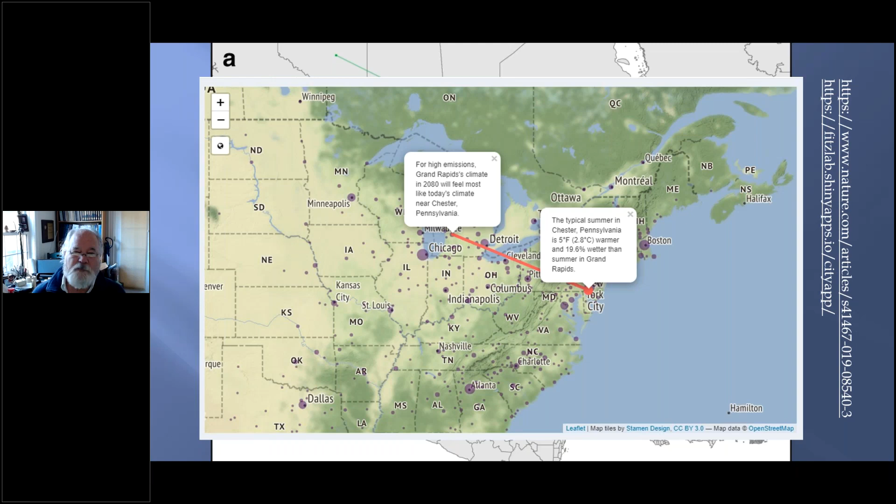So I don't have one for Turkey specifically, but this is an example of that for the US, showing how temperatures are moving from cooler to warmer, more humid conditions. This was for Grand Rapids, Michigan, up kind of northeast of Chicago, and it's going to get a lot warmer and more humid, more like Philadelphia is today. So quite a bit of change there, saying 2.8 degrees warmer and 20% wetter.

Now, I'll talk about what that might mean in Istanbul later, but I want to go through the rest of this pretty quickly. The IPCC, the Intergovernmental Panel on Climate Change, has a set of scenarios, and these are just storylines to represent the range of what could happen in social, economic, technological, and environmental issues. They are updated for each assessment report, which are done somewhat irregularly. The last, assessment report 5, was released in 2013, but we're beginning to see data for AR6. It just hasn't been out there yet.

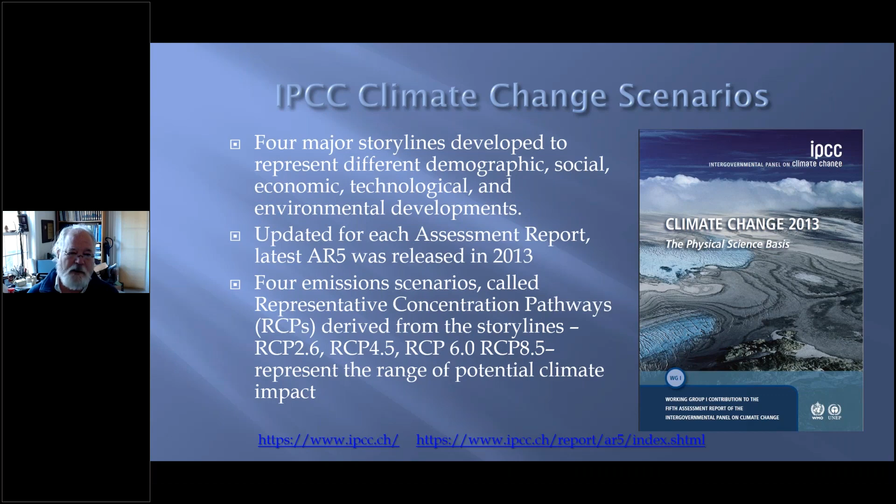The scenarios are called representative concentration pathways in AR5, and they're derived from the storylines. What's going to be the cause or the result of the different storylines in terms of their climate impact? You see here they vary quite a bit. The RCP 2.6 is if we do everything we possibly can, if we control climate change to 1.5 or maybe 1 degree C. Very difficult to do. I don't think we're going to get there.

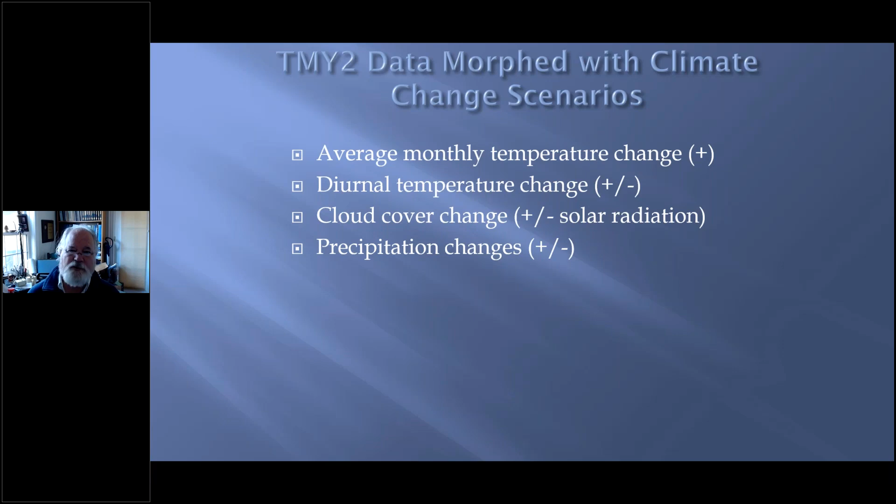So to morph a data set, we start with a base data. I'm going to use TMY data here. It has an average monthly temperature change, usually an increase. There's a change in the diurnal range of temperature, daily range, sometimes plus, but more likely a decrease. Some cloud cover change, which changes solar radiation, and then precipitation.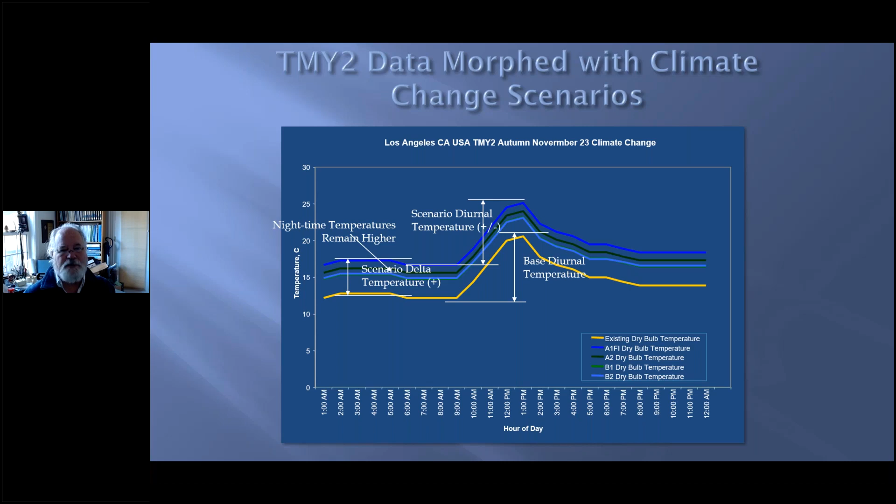So this is an autumn day, a fall day in Los Angeles, November 23rd, quite nice day. It starts off at about 12, gets up to about 21 during the day, and that's the yellow line. The other 4 lines represent what the data are when they're morphed. There's a base daily range or diurnal temperature. There's a scenario diurnal temperature, often a little bit fewer degrees, so the night times tend to be warmer. And then we have a temperature delta to calculate the difference. So it's not just simply adding a delta temperature, it's also looking at how it changes throughout the day.

Heat island can be represented similarly. This is based on several measurement studies I've seen done before the 2018 study for Washington. The annual average range is roughly 1 to 5, and it seems to be a function of city population. Beyond 5 million, it kind of stabilizes around 5 degrees C. It tends to depress the daytime temperature. All the hard surfaces, the mass, is absorbing heat all day long, but after the sun sets, it tends to raise the nighttime temperature.

So this is what one looks like. Here's Washington Dulles, a spring day, April 10th. Can start off cold, like today it started off at 4, and in this case it's moving up to about 17 during the afternoon. That's the yellow. And then you see the 1 degree, which is the red, and the blue is the 5 degree range, and seeing what's going on there.

We've got lower daytime temperatures, not a lot, just half a degree or less, but the temperatures tend to remain higher. As that mass begins to give off its heat, as the air temperature drops and the solar radiation goes away, it tends to keep the air temperature higher. And they stay higher till about sunrise when they go back up again. But you also see that diurnal variation is a lot less in this case.

So here's an example of what that means. This is Dulles again. We have the TMY data there, and then we have the 4 RCPs or scenarios for that, and your monthly data showing the variation. Pay attention to the red and the blue, though. Those are the key things.

So in Washington, we don't really start getting cooling until March, and it's not a lot of it, and it kind of extends into October. But our main heating months are November to March.

But then if you look at some of the scenarios, particularly the far right, you're seeing a little bit of cooling creeping into those months, and the cooling itself is going up significantly in the summer, and it's spreading toward those shoulder months as well. So that's not unusual for what you see. This is kind of a mixed heating cooling climate. So let's look at some of the others.

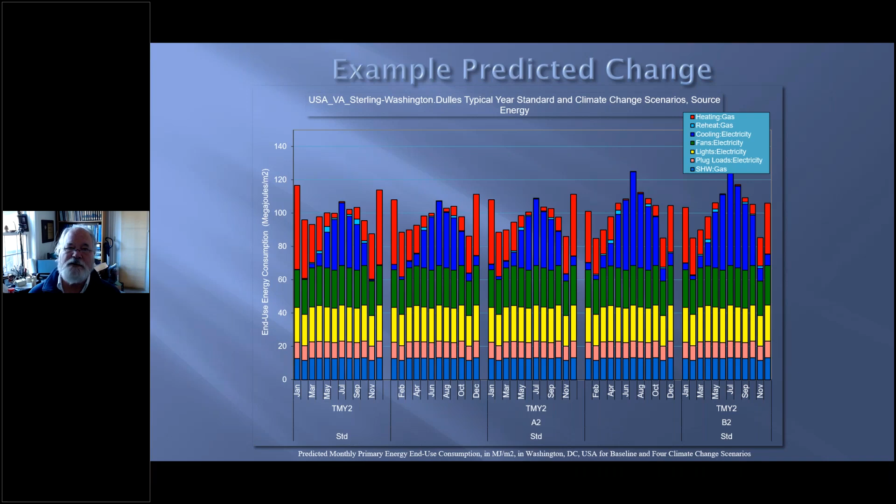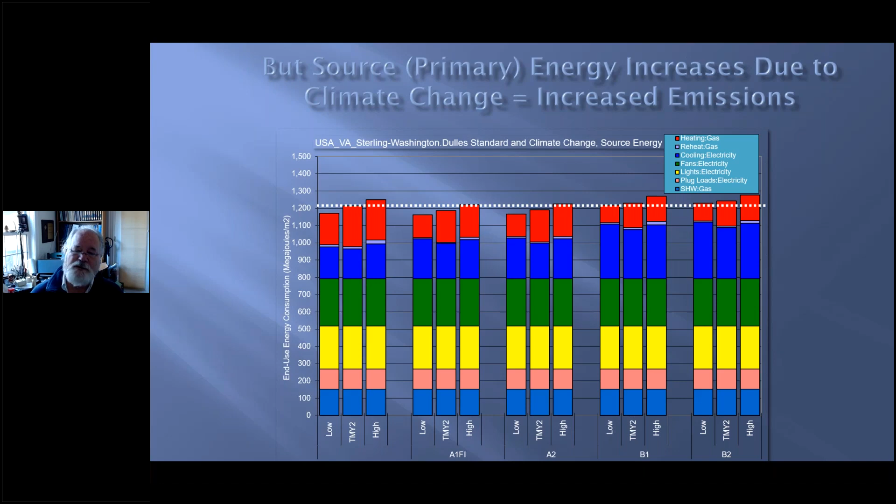This is a snapshot looking at Washington Dulles again, but site energy, it means overall that it's about the same. If we look at source or primary, we are starting to get increases, but that's due to the cooling increases outweighing the heating decreases in this case. But if we take that building and design it to be 50% of code, a low energy building, we can mitigate those impacts almost entirely. It reduces that variation there entirely.

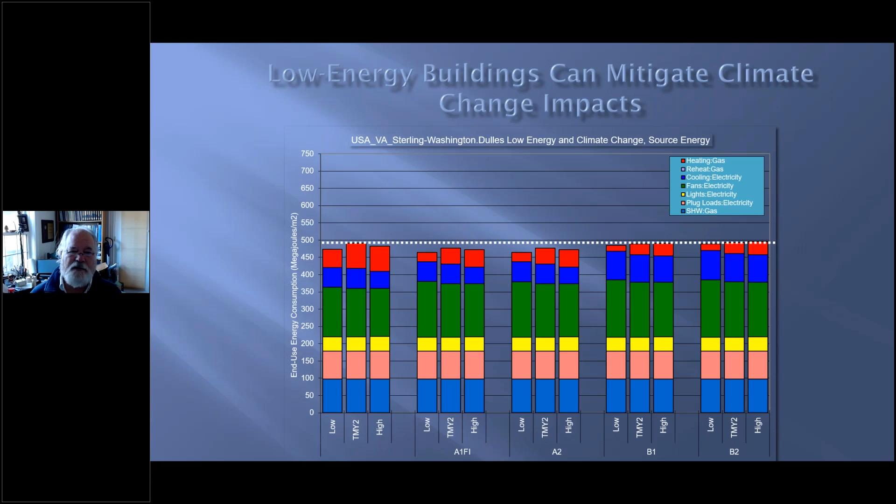If we look at Singapore, Singapore doesn't have heating and cooling to trade off. So we're seeing increases on the order of 20% or so in cooling, sometimes 30% for the various scenarios. It's just going to get hotter. Low energy buildings, though, can have the same effect in Singapore as they do elsewhere. They can mitigate most of that impact for us, which is great.

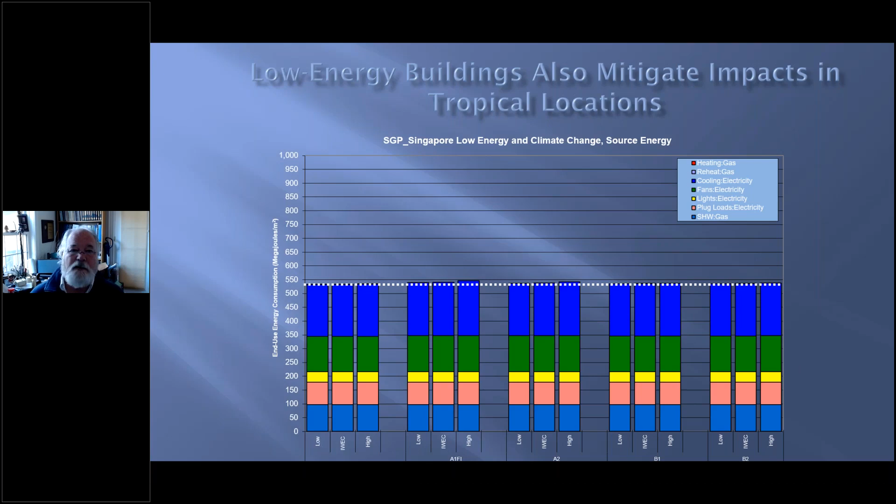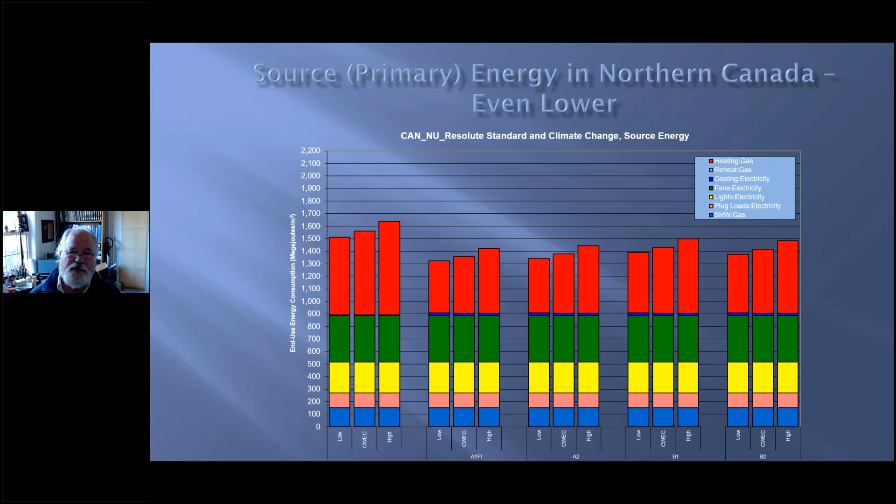The other extreme, this is that Canadian location in the far north, Resolute, and you see that heating's dropping on the order of about 40% due to the scenarios for that. Low energy buildings also, but mostly they build low energy buildings there anyway. They have to be very efficient. It's a location that it rarely gets above 4 or 5 degrees in the summer. So very much a heating dominated climate.

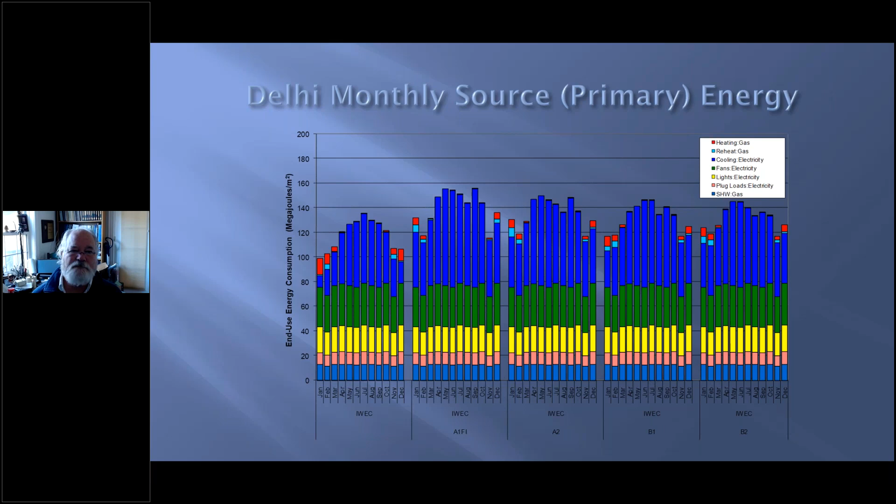The largest change overall. Sorry, you have a few more minutes. So if you just shorten. It's my next to last slide.

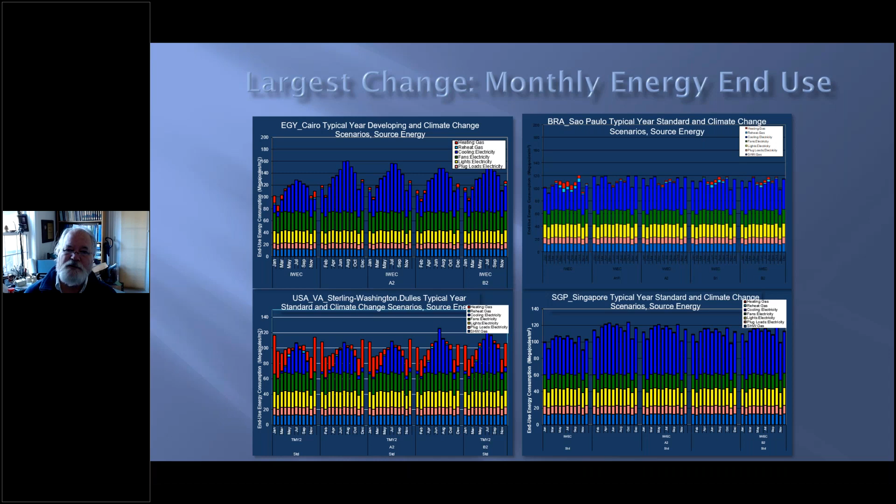Okay, good. So this is the monthly energy end use that we've seen before, and you see how that's changing. Sao Paulo, the top right, I haven't shown you, but you see that there's a little bit of heating demand. They don't really heat very much in Sao Paulo, but extending over into the other scenarios, that almost disappears, and substantially more cooling throughout. So with that, I'll go to a summary.

We have to have climatic data for doing our building design, our HVAC systems sizing and selection. We need building simulation. We need typical, actual, and future data. There's been some work on trying to bracket that typical with extreme meteorological years. No real conclusion there yet, but we have sources of data now that were unavailable even a decade ago, both the traditional airport ground observing stations and the satellite data. We can represent the climate change scenarios in this data set by using morphing, modifying files.

Higher latitude climates are going to see decreases because heating's decreasing more than cooling, but tropical, semi-tropical are likely to see increases, but primarily due to increased cooling. But the good news is that we can mitigate most of that impact by going with zero energy or even 50% lower than code requirements that can mitigate most of that impact and make our buildings kind of resilient and climate proof. But overall, significantly more hours of cooling equipment operation. And that's something I'm looking into right now.

So what can you do? Design the best building you can. If you're concerned about potential impacts, look at the next warmest climate. Is it Istanbul to Beirut? I'm not quite sure how the climates compare. I know Istanbul is quite affected by the water there, so it's not clear. Maybe it's Alexandria. That might be a better view there. But Delhi to Mumbai, Boston, New York City, and look at the design conditions and see how different they are.

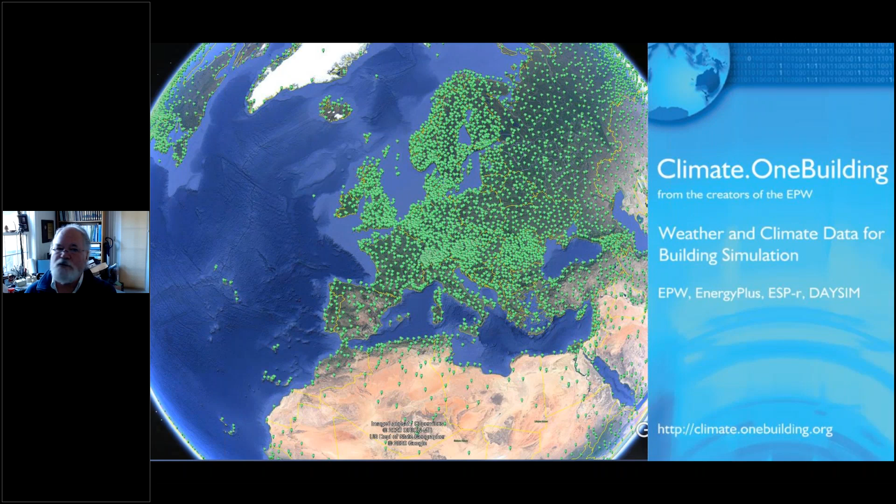And if you're doing simulation, you could use a climate file from one of those other locations and look at the impact. Last, I'll just say that data set, 16,000 locations, there's quite good representation, I believe over 100 locations in Turkey at this point, and data are available there. So with that, I'll leave it and say thank you.

Okay, thank you, Drew. Thank you so much. Actually, this is really nice to hear. As far as we know, this climatic issue is the most critical point of our future design principles. So it is good to hear that it is somehow possible to mitigate the impact of climate change by precautions regarding zero energy or energy efficient strategies. But on the other hand, it's not possible to stop these climate change issues, I think, so we need to adapt our future buildings based on these inevitable changes. If you agree with me, I don't know.

I agree very much, and I'm sort of sorry that Luke's presentation and mine weren't the other way around, because this doesn't mean that we shouldn't be doing the best we could do and taking our buildings to zero. From the operational side, we have a lot to do, and they are a huge impact. 34% of global emissions are related to buildings. So if we're not doing something in our buildings, we're adding to the problem.